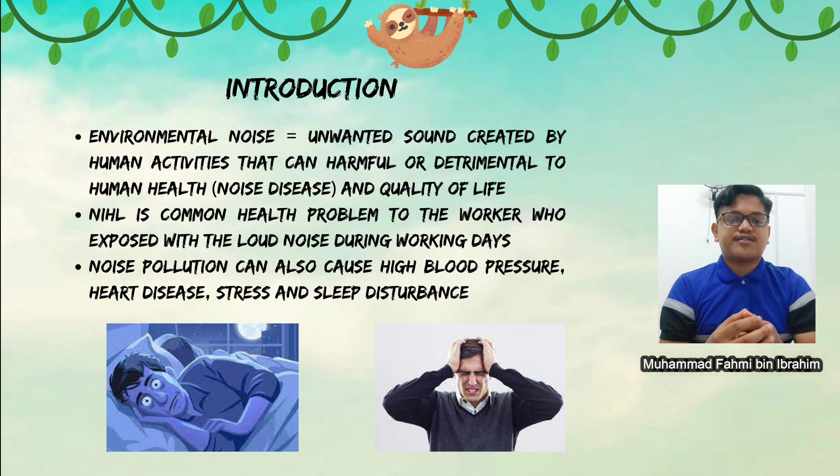Problem statement: noise disease caused by Malaysian industries such as welding, construction, and manufacturing seems to be slightly ignored compared to other acute diseases.

Thus, a proper noise risk evaluation was needed to detect which industry might be exposed to the high risk of getting noise disease. So the objective is to compare the data of noise risk evaluation to find possible diseases caused by each industry based on the decibel produced.

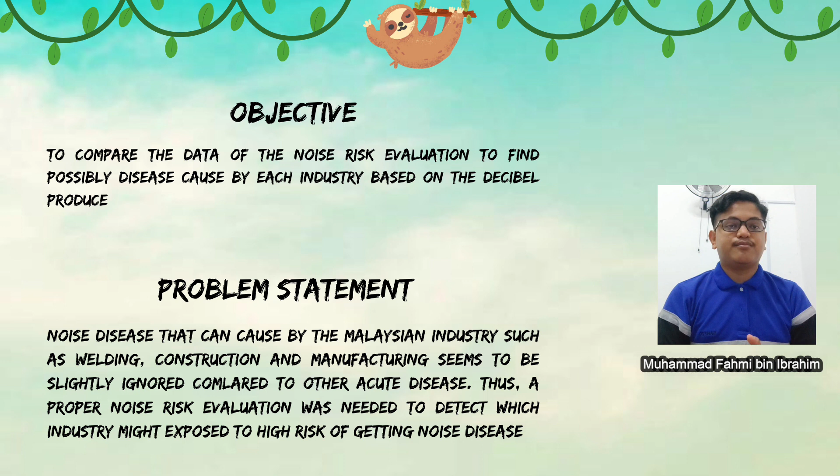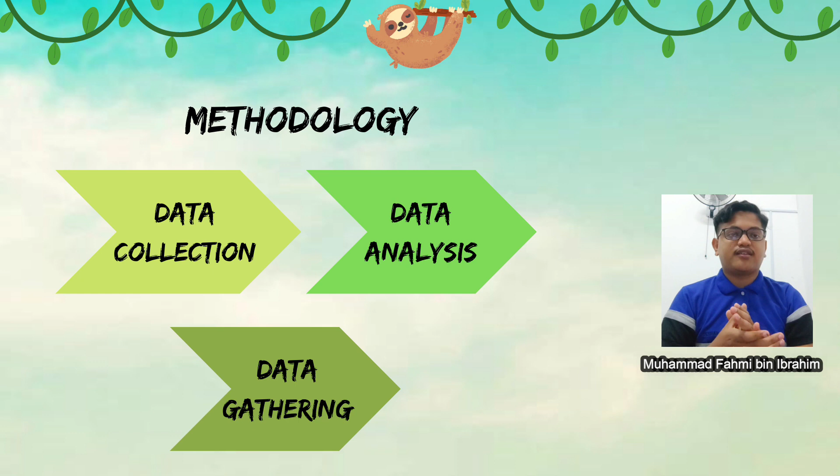There are 3 steps of methodology: data collection, data analysis, and data gathering. First step is data collection.

For measurement of noise, we use a sound level meter. Before starting the measurement of noise level, we will identify the types of locations where we want to measure noise level.

For the noise risk assessment, we will conduct measurements at construction sites, industrial areas, and workshops. Once we identify the location, we will select the position to place the instrument, which must always be positioned away from direct sources, vibration, and any obstructions.

For noise measurement, we will take readings three times a day: morning, afternoon, and evening. The sampling recorded includes the amount of workers involved, time, location, and the specific activity of workers during working days.

After measuring the noise level, we will analyze all the data with hierarchy analysis and risk matrix. Hierarchy analysis consists of ranking the likelihood and severity of each industry activity. This ranking can evaluate the total risk of each activity obtained. With the total risk of welding, construction, and manufacturing, we can identify the decibel scale of each activity.

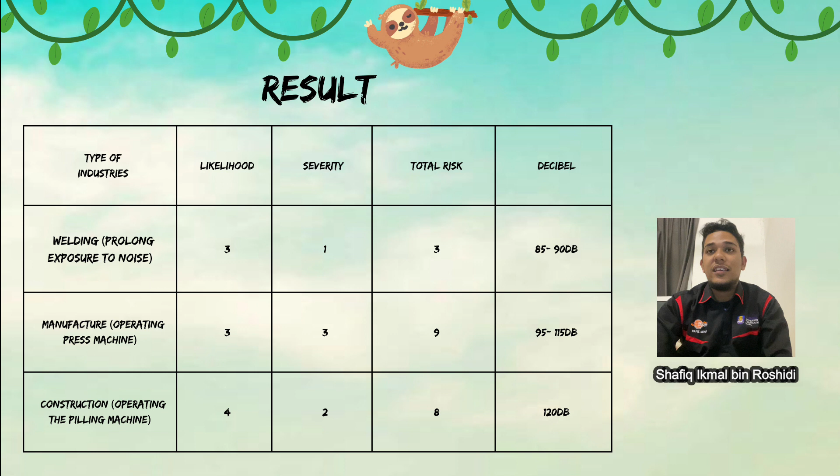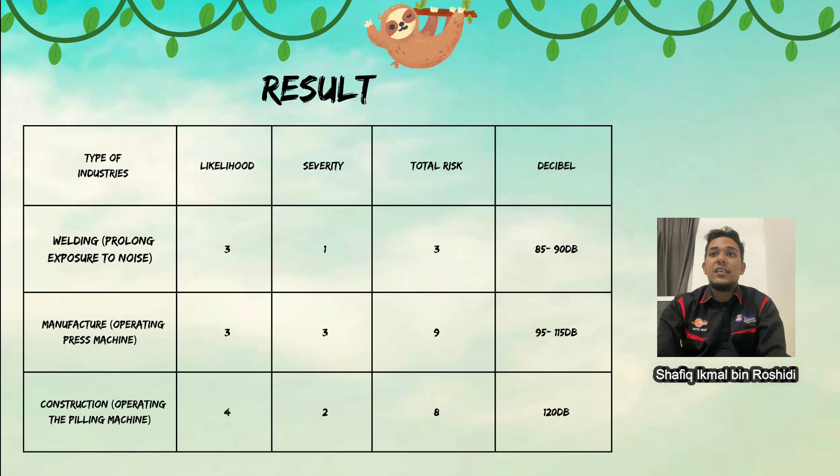And lastly welding with 3. For the sound produced from these 3 types of industry, the highest is construction with 120 decibels, followed by manufacture at 95 to 115 decibels, and lastly 85 to 90 decibels for welding.

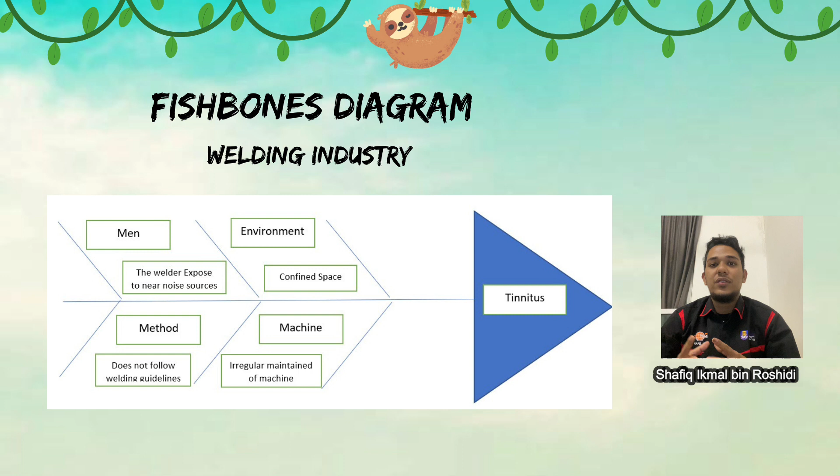To study in detail about the decibel value of the 3 industries, we came up with our own fishbone diagram with several factors involved related to the cause of the disease. The factors studied are man, environment, methods, and machines.

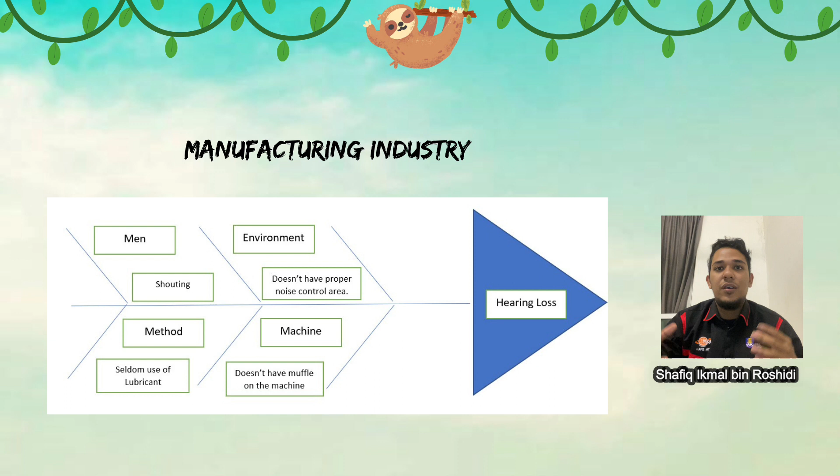After that, we found for each industry the corresponding disease: for welding, the disease is tinnitus; for manufacture, hearing loss; and lastly, for construction, acoustic trauma.

To show the scenario itself, let's go to the scenes.

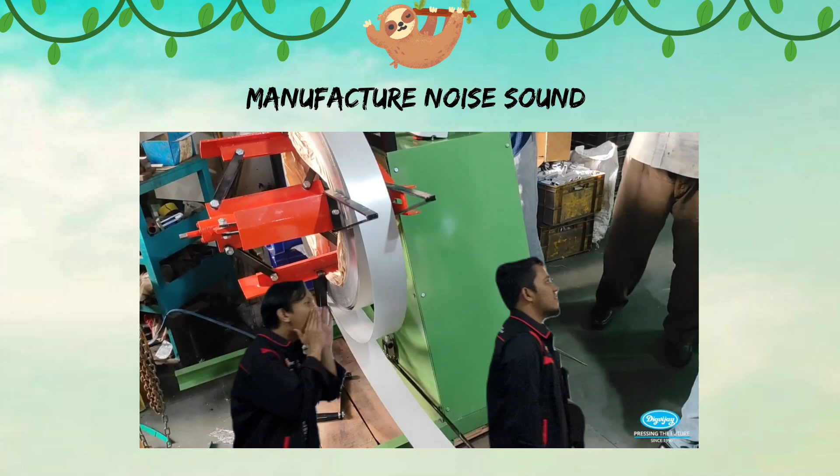In the welding industry, in order to form a weld, a heat source is required, such as from the electric arc, from flame, pressure, and also friction. The friction from the heated surface caused by the welding machine can produce noise that could be dangerous over a prolonged time. Irregular inspection and maintenance of the welding machinery could increase the noise.

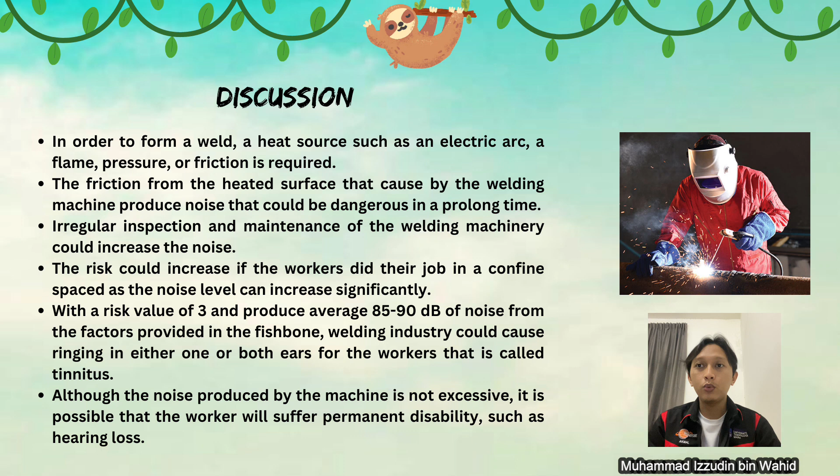The risk could also increase if the worker did their job in a confined space, as the noise level can increase significantly. With a risk value of 3 and producing an average of 85 to 90 decibels of noise from the factors provided in the fishbone diagram, the welding industry could cause ringing in one or both ears of the worker, called tinnitus. Although the noise produced by the machine is not excessive, it is possible that the worker will suffer permanent disability such as hearing loss.

The next one is from the manufacturing industry, where the noise usually comes from the power press. A power press is a machine used to cut metal into a specific shape, utilizing its ability to perform shaping and cutting simultaneously. This repeated activity of metal cutting can cause noise, and the non-existence of the muffler at the machinery could increase the noise value along with other factors such as seldom use of lubricant.

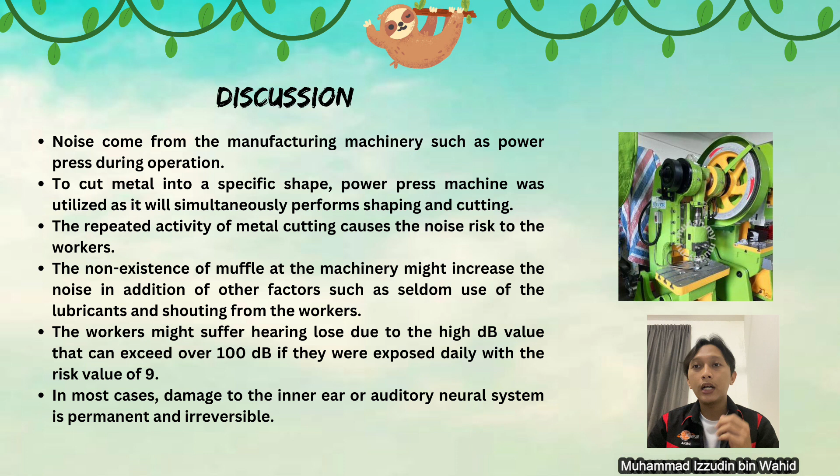The worker might suffer hearing loss due to the high decibel value of the industry, which can exceed 100 dB if exposed daily, with a risk of 9. In most cases, damage to the inner ear or the auditory neural system is permanent and irreversible.

Last but not least is the construction industry, where the highest noise can come from piling activity, which can also cause delays to the project. The repeated piling process, which completes the insertion, can cause excessive loud noise to the surrounding area, especially if operated in an open area.

The sound from other construction vehicles such as bulldozers and trucks can also cause excessive noise. During the piling process, the noise level can reach almost 120 decibels, and with a risk value of 8, it could possibly cause acoustic trauma, a condition where the inner ear of the victim is damaged by a single loud noise.

Compared to other industries, construction industry noise can be stopped when the project is finished, because it is not a long-term project. So that's it for the discussion. Thank you.

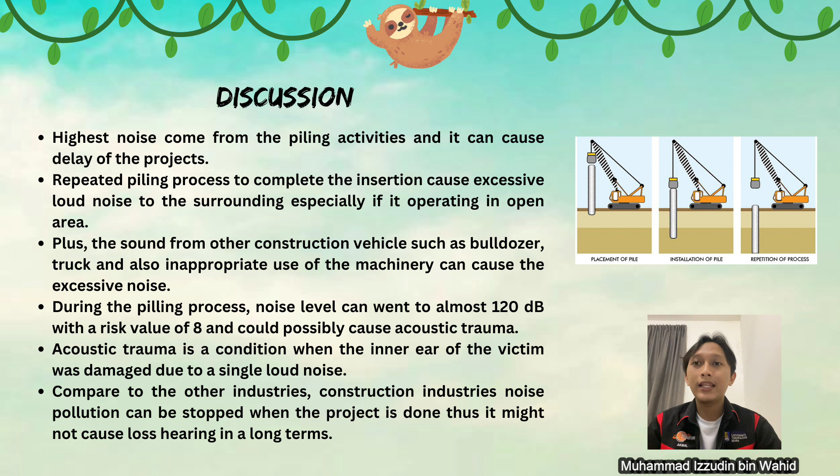Okay, we go for recommendations. In the manufacturing industry, one way to reduce noise pollution is by modifying the path through which the noise travels through the air to the people exposed, by erecting an enclosure around the machine to reduce the amount of noise emitted into the workplace or environment. We can also use barriers and screens to block the direct path of sound and position the noise source further away from workers.

Next, the control measure recommended for the construction and welding industries is providing ear muffs and ear plugs to the workers who operate the machine each time. Wearing ear plugs followed by an ear muff could help prevent noise from the machine, which in turn helps prevent hearing loss.

For the conclusions, this analysis has helped us assess and identify situations, processes, and other activities or hazards that produce noise. Based on the data and results from the three industries, we can conclude that the manufacturing industry is the highest risk, which can lead to serious hearing disease such as hearing loss, followed by construction and welding industry in Malaysia. Manufacturing industry is higher risk because a lot of manufacturing processes, machinery, and equipment produce high noise levels in daily situations, which can lead to chronic disease, especially for the workers.